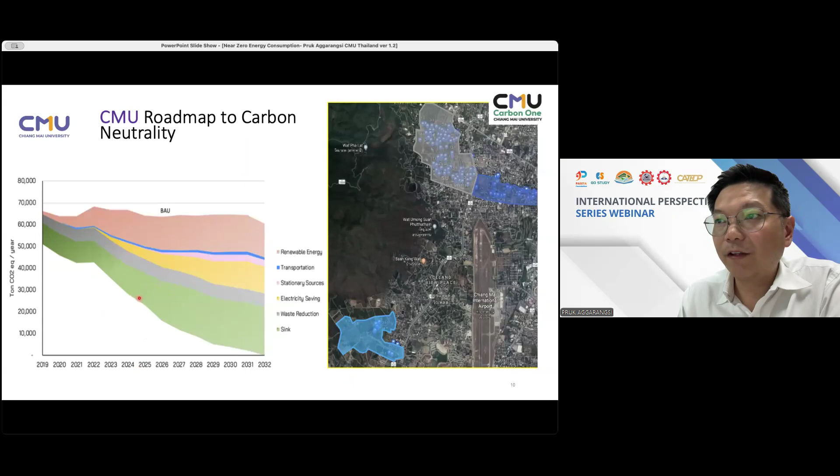So when you said you have a roadmap, it actually looks like this. Today is 2025, about halfway since the draft of this roadmap. CMU said 2050 is too far. CMU itself is not a big university - we have about 50,000 people, students, professors, including hospital staff, altogether 50,000 people. So it's a medium-sized university, but we are committed to 2032 footprint reduction to neutrality.

If you want to compare how big Chiang Mai University is, you can see this slim area here is Chiang Mai International Airport, like a 1.5 kilometer runway. And Chiang Mai University campus is here - campus number 1, campus number 2, and campus number 3. So we have altogether 3 campuses around the Chiang Mai International Airport area. So it's not small, but it's not that big in terms of a university.

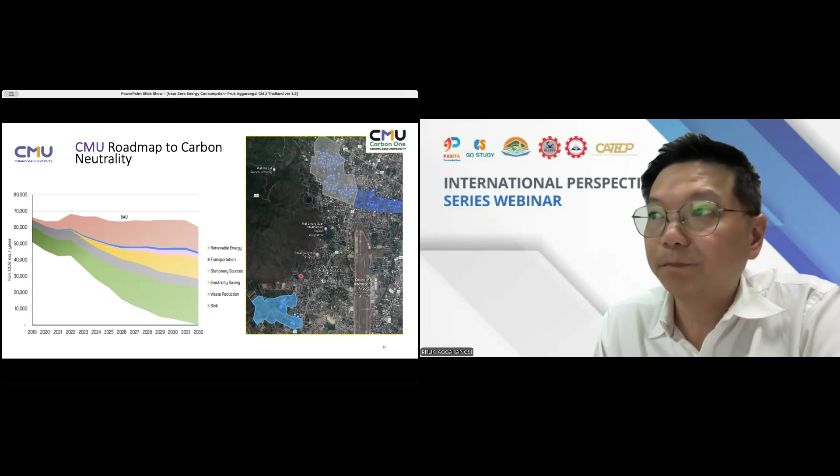Okay, so from those carbon reduction pathway or roadmap, you can generally dedicate topics into these pathways. Today we are going to talk about energy monitoring and demand control on the lower left side. But of course, we are doing something else like lighting, street furniture, infrastructure, carbon capture and storage, recycling and upcycling facility. So today we are only going to focus on energy monitoring, but in the near future, if we have another opportunity, I am more than happy to share other things with you too.

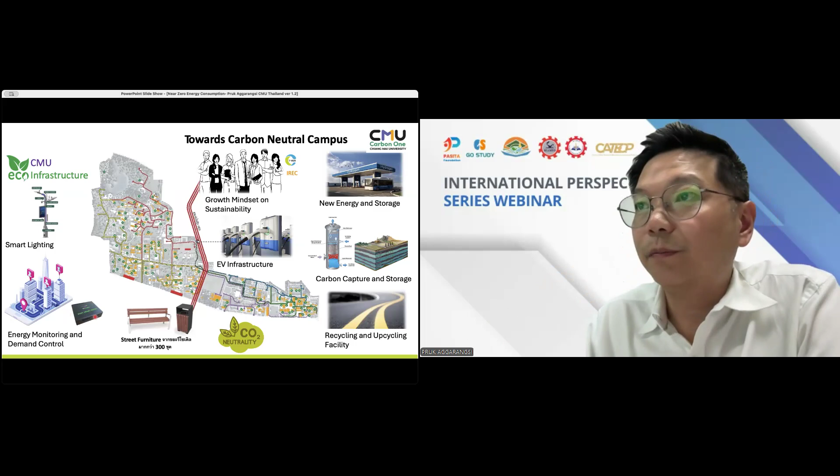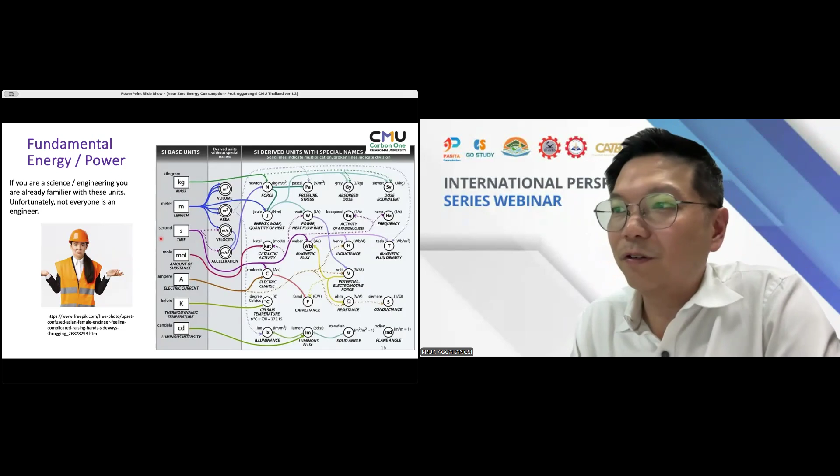Okay, so if you are not from engineering, nothing is wrong with you, because these number of units are the job of the engineers, it's not you. But if you want to learn, I would just give you a good hint: not everything you need to know. You only need to know a few things, such that you know how to measure energy, how to work with power rating and estimate energy. So that's the goal of today, right?

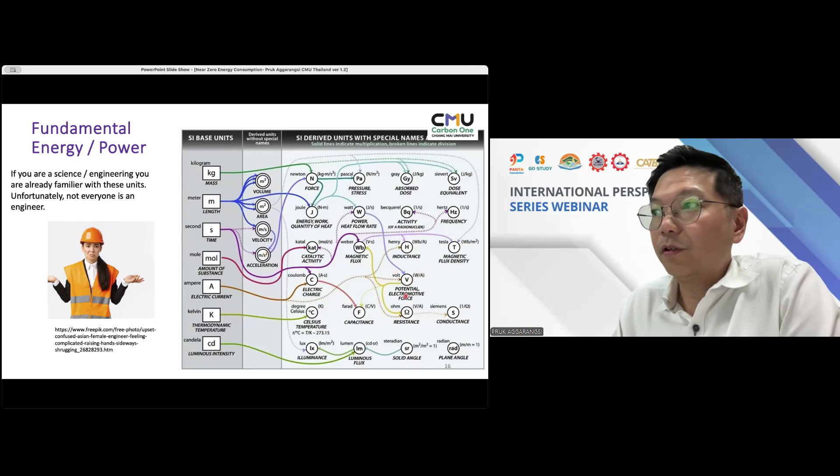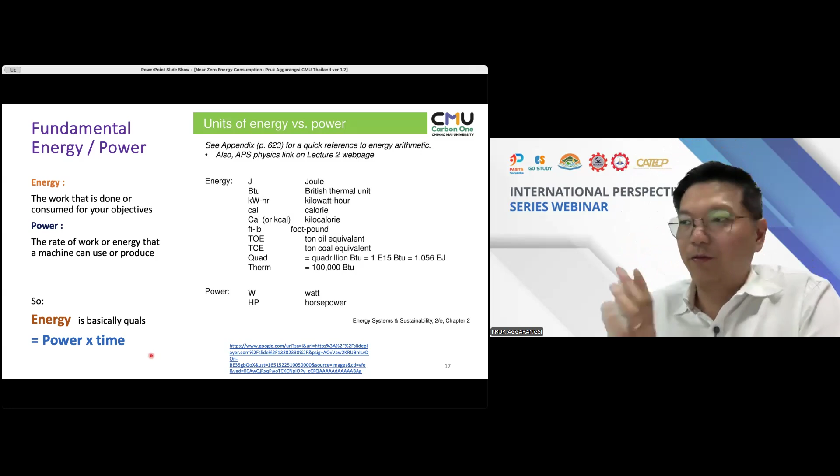So as we had done in the quiz, energy is the work that is done or consumed. Power is the rate of work or energy that can be used or can produce. So energy basically equals power times time, or power is energy divided by time, right? So it's straightforward as that. Because from this point, you're gonna hear words like kilowatt, kilowatt hour, watt, and so on and so forth. So let's make sure that when I say kilowatt hour, it's basically a chunk of energy, and when you say watt, it's the power of the machine or the power that is being consumed. So that is that.

So in real life, you have to come across a lot of energy. Most familiar is electrical, you use it all the time.

In fact, you are plugging in your computer right now. You are familiar with this, but there are other forms of energy. So that is why you have to convert.

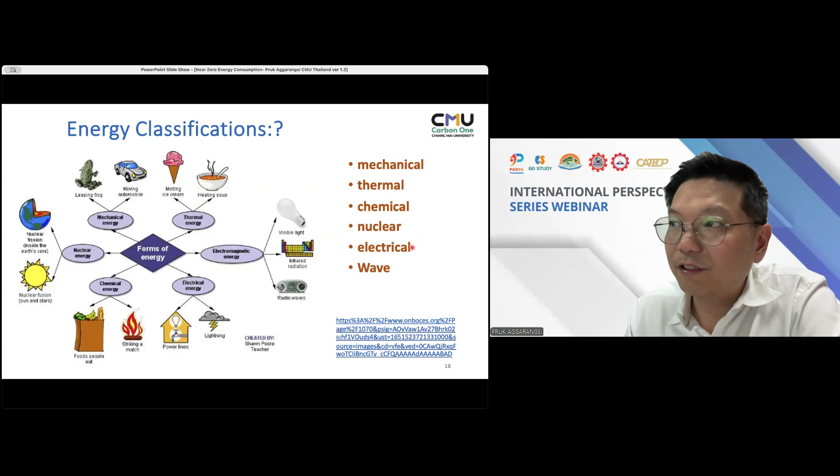For example, you have natural gas, you have to convert natural gas to electricity. Natural gas is chemical energy, because it is a chemical composition that contains energy between the molecules. You burn it up, you change it into thermal, and then probably into mechanical, and then you change it further into electrical. So in order to produce energy, you actually convert a lot, especially when you produce it from fossil fuel. You have to convert to many forms of energy until you get electricity.

Let alone you have to transport electricity by the transmission and distribution. So that's a huge infrastructure to support you having electricity. The convenience of electricity is just the accumulated action from the past, that you keep building infrastructure, you keep building the stable facility to support your convenience. So it's not easy to deliver electricity to your house or to your building or to your office.

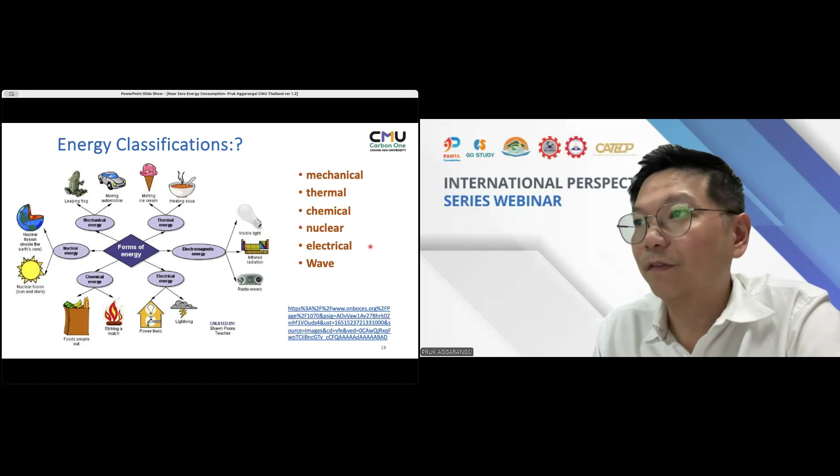Okay, energy comes in several forms. So right now, I think we all agree that, okay, number one, electricity is not easy to produce.

Number two, it uses up, especially if your country, including Thailand, uses the majority of input as fossil fuels. You keep burning fossil fuels, produce electricity, deliver to your house, and then you consume. Then as a consumer, you never have to think for a bit about where it's from. It's always delivered, always very convenient. So that's not very good. I would love everybody here to consider that electricity is not easy to deliver to your doorstep or to your electrical outlet.

In order to proceed, number two, you need to know the unit of electricity. Electricity measurement, right? So if you are a concerned citizen, I think we all agree that we are all concerned about the consumption of electricity. So electricity or energy is power times time, right?

As we agreed, for example, if you have a refrigerator that has a power rating of 800 watts - power rating means whatever is written on the label of that machine. If the power rating of the refrigerator is 800 watts, that's actually the maximum electricity the refrigerator can take. But in normal operation, it only takes 20%. So good for you, it only takes about 160 watts on average. But electricity supplied to this refrigerator is being plugged in 24 hours.

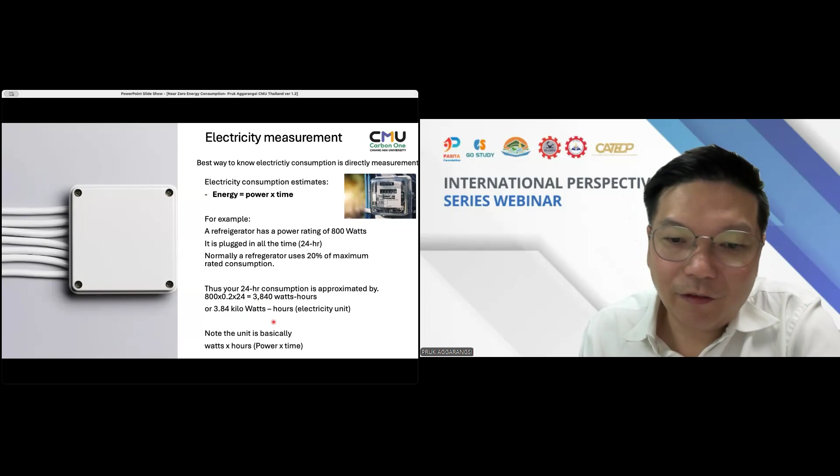You multiply with whatever rate your electric company is charging you. With that, you have to pay them at the end of the month. At the end of the month, you multiply this number by the price and by 30 days, and that's how much you have to pay for that refrigerator.

Of course, this number is an estimate. If you are not such a concerned citizen, you open that refrigerator almost all the time, that 20% might increase to 50%, who knows? But in general use, that number should be okay.

So the unit is basically power multiplied by time, and in this case, the time used to calculate the unit of electricity is hours. So one unit of electricity is a kilowatt hour. I think we all agree on that. Sorry if I repeat something so easy for you from engineering or science, but I believe there is an audience that's not familiar with these two.

Okay, let's talk about buildings. In a normal office building, especially in Thailand and tropical countries like ourselves - I think many of you are also from Indonesia - you can easily get about 50% of electrical consumption going into air conditioning. I think that's normal. In Thailand, in some seasons, like summer season, this number goes up to 65%.

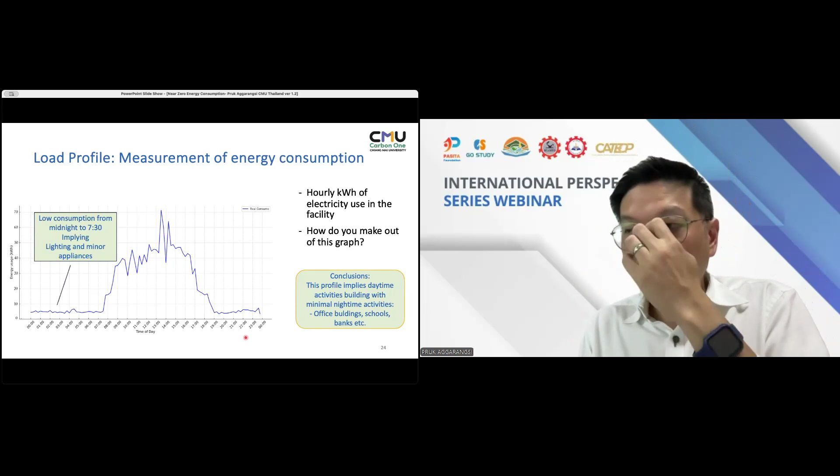So these are the observations: low consumption from midnight to 7:30 a.m., implying no one is here. Only the lighting in the corridors and some facilities with minor appliances are consuming power. But then abruptly at 7:30, people start to arrive. That means from this graph alone, I don't really have to see the building — from this graph alone, we can judge that this is an office building, because you can see people arrive at 7:30 altogether and start turning on air conditioning, lighting, computers, and everything. It ramps up to this point.

It is about almost 10 times higher than the night loadings, okay? And again, an abrupt decrease after 7:30 p.m., indicating end of activities. So the conclusion of this facility — I have seen a lot of these — in fact, all of the buildings, almost all of the buildings except the hospital in Chiang Mai University, act like this. So why is this important?

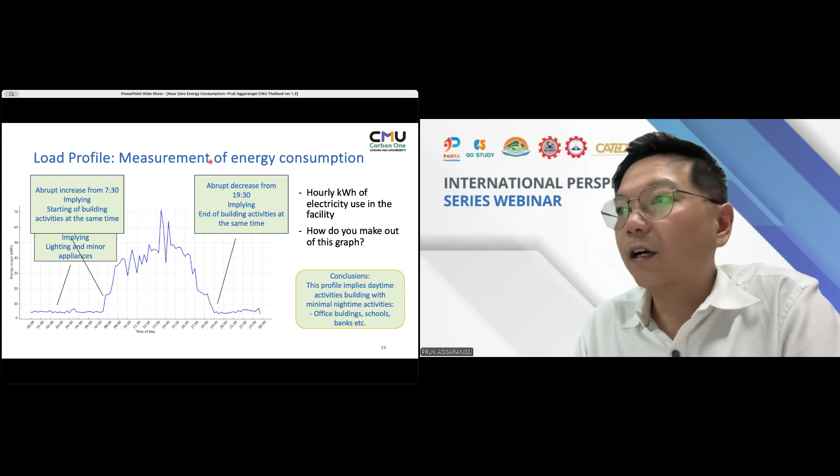If I have a graph like this from every building, I can plan further what to do with that building. So this building can be an office building, school, university like ourselves, banks probably, department stores maybe, and those kinds of daytime facility buildings. So this type of building has to be managed with one set of principles.

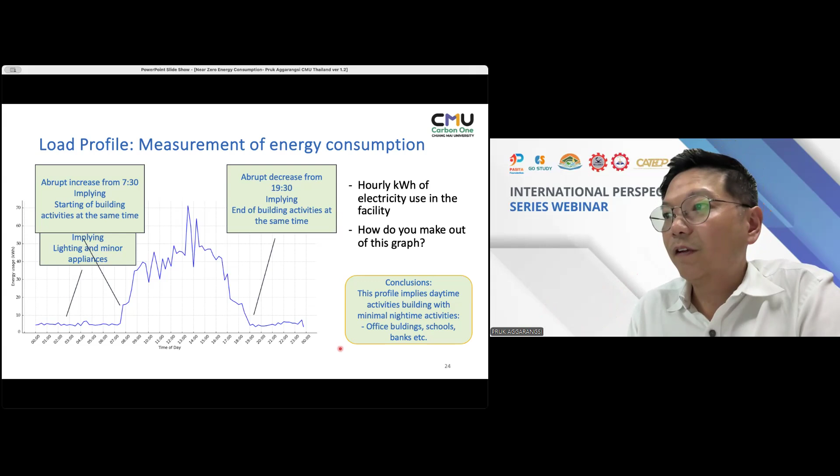And then what you see next is, you start to arrive home about 6 p.m., and then you start doing something — some cooking, maybe some activities, you turn on some appliances — and then at the end, you turn on your air conditioner and go to sleep. So if you see this kind of curve, I would say it's a typical nighttime household profile.

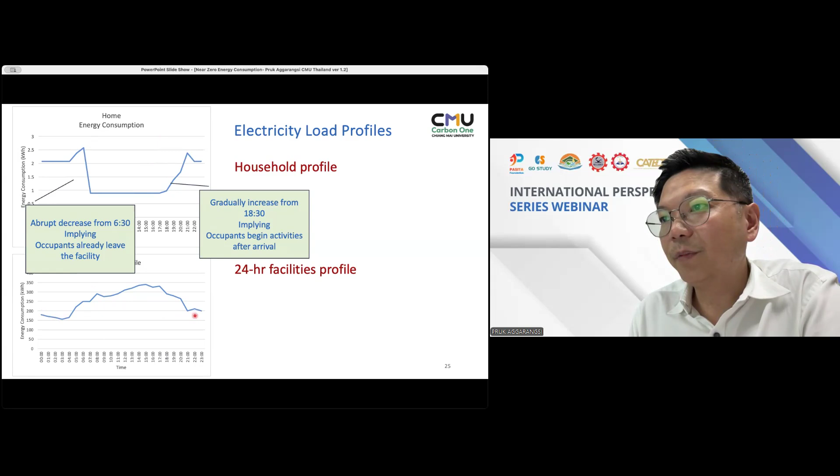Okay, so that's another type of electrical profile. But then let's look at this hospital profile. You can see there's not much change between 24 hours. It doesn't go to zero in the nighttime.

It's still about half or more than half of whatever happens in the daytime. So something suggests that this building has activity for 24 hours. For example, in a hospital, the air conditioning system never stops, right? But then during the daytime, there could be more activity than the nighttime, but the majority of the consumption never stops. It's 24 hours, so it's implied that this facility has 24 hours service, okay.

So daytime load likely curves towards the temperature of the day. That's another observation, right? Basically, people come in, have more activities. When more people come in to use more activities, and also the daytime temperature increases, the load increases according to the temperature and the activities. So you can justify or make an educated guess that the main consumption should be air conditioning.

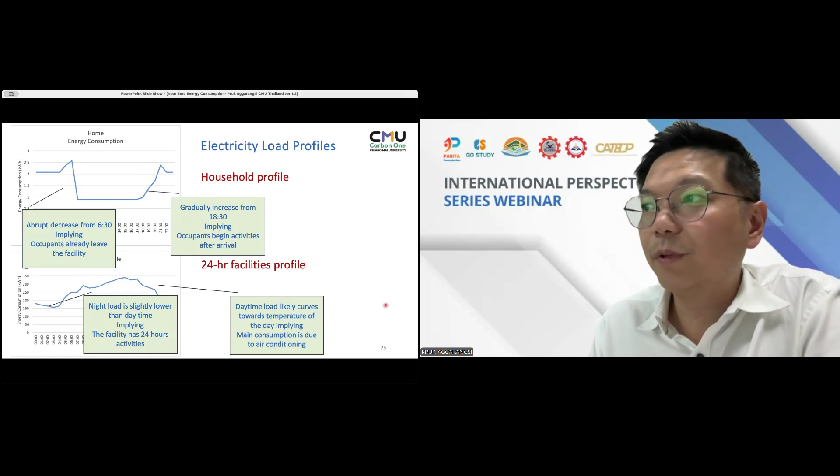So being in the field of energy management is more or less like a fortune teller - instead of reading the lines on your palms, you just read the lines from the graph and make a good guess about the facility. But it doesn't end there. You have to suggest, when you know this, what can be done more, what you can do better to optimize this facility.

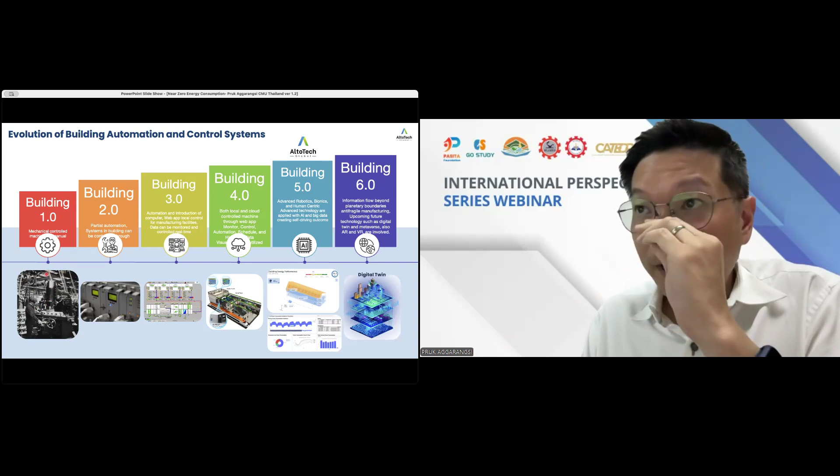You never know - you're going to have to do almost manual measurement, right? And we try to upgrade those buildings into 2.0 or 3.0 where you can monitor and have some control of the facility. So in the near future, you will see more and more new buildings being built with more and more control. Building 4.0, you have absolute control, but it's still human control.

You have a control room, seeing everything - which light switch is on, which aircon is on, what is the temperature outside, how many people are in the room - and you can manually switch on and off or adjust temperature or adjust whatever power consumption in any room. You can see a lot of these 4.0 already in many new buildings, in hotels, in convention rooms, in department stores, because it's so convenient for them not to walk a long way to turn anything on and off.

So when you have 4.0, the next leap is the so-called AI integrated system. You can have someone else working the job for you, making the decision for you within the rules that you set. For example, if the building sees no people in some room, it can automatically turn off the aircon or turn off the lighting by itself. You don't really have to do anything.

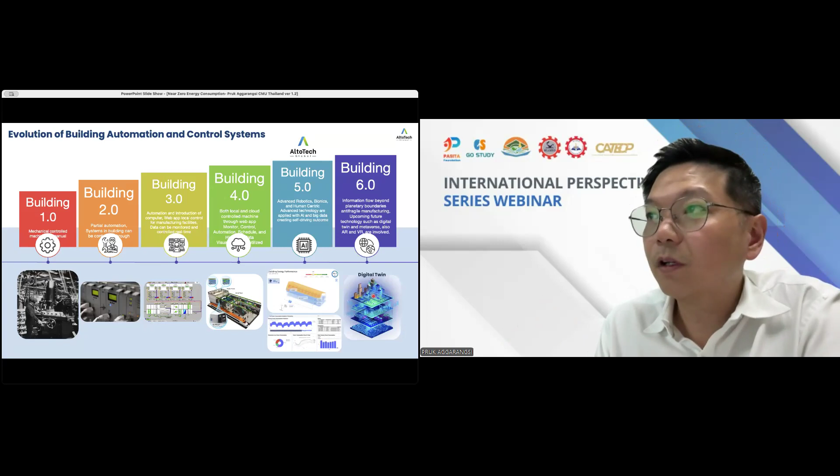Okay, so the problem arises - if we have a 1.0 or 2.0 building, how can we become near zero? The mission of this building is we have to turn this old building into a near zero consumption building. So the definition of near zero means it has very high energy efficiency, right? So you have to, of course, work on the hardware like insulation, air leakage, lighting and appliances, making sure that they are highly efficient, low energy consumption, with an efficient aircon system.

And then another important approach is you have to integrate renewable energy into such a building, and you have to integrate energy management into that building. Okay, so I can show you a little bit more about that. If you want to put that in numbers, usually building 1.0, or the building as we're familiar with, is way out here - the building that we use as is, we don't have to care about anything.

We haven't been looking at the consumption. If you start to manage and optimize the efficiency of the building, you can decrease the consumption, let's say from 1.0 to about 0.65, or even sometimes by half of the general consumption. This can be done especially in an old building. Sometimes you just replace an old air conditioner with a newer, much more efficient version, and you decrease the energy consumption by almost half of what you've been paying. Sometimes investment into new air conditioning pays back in 4 years just from efficiency improvement alone.

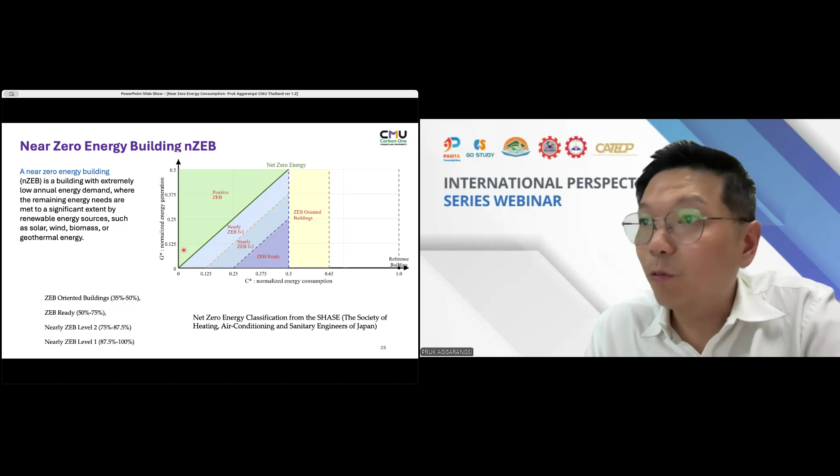First goal: reduce your consumption. Second goal: try to produce more renewable energy. The easiest renewable energy to produce is obviously solar energy. You can install solar, wind, biomass, or whatever, but solar is the easiest way.

Before we talked about conventional buildings with transmission and transformer buildings. You can also have an electric vehicle charger. But if you want to integrate solar panels into the system, you can just install it, or you have a choice of installing solar panels together with energy storage.

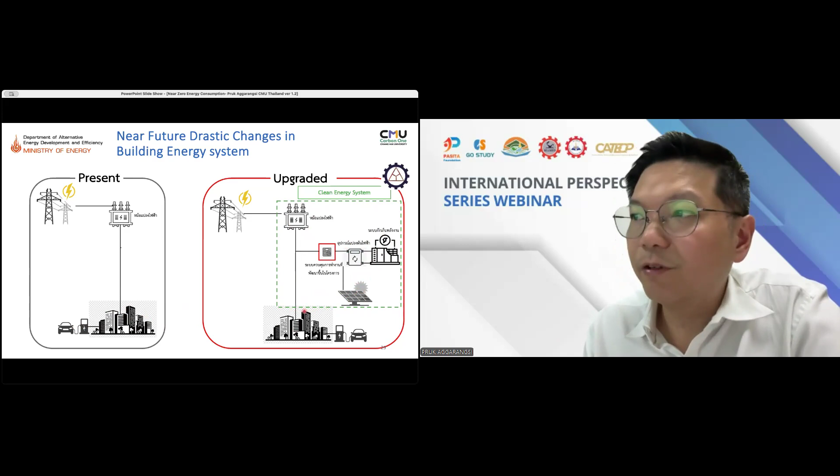Sorry, I haven't changed some Thai words, but it's solar and energy storage. And then in the green box here, you have an energy monitoring and control system. That is the approach we took with our buildings.

So what we did was with the Energy Research Institute building in Chiang Mai: you have energy consumption of about 100 kilowatts, and you have three solar systems of 100 kilowatts and 30 kilowatts. The number already looks good, right? You only consume 100 kilowatts on average, but you already have 100 kilowatt plus 30 kilowatt plus 30 kilowatt of solar panels. That 160 kilowatt looks like you're in good shape.

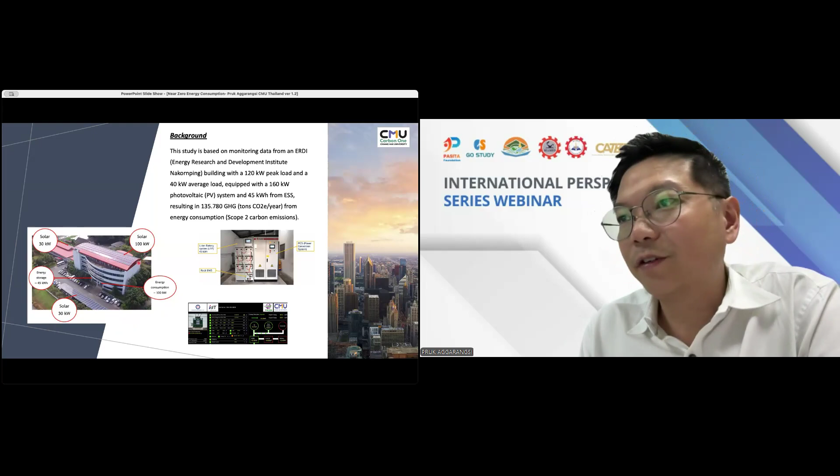On top of that, you still have nighttime consumption where you don't have solar at all. So it's very difficult to match this 100 kilowatt average with the 160 kilowatt solar and achieve zero energy consumption. So the help we have is this: we installed a battery system such that you can try to match the solar panel output with the energy demand.

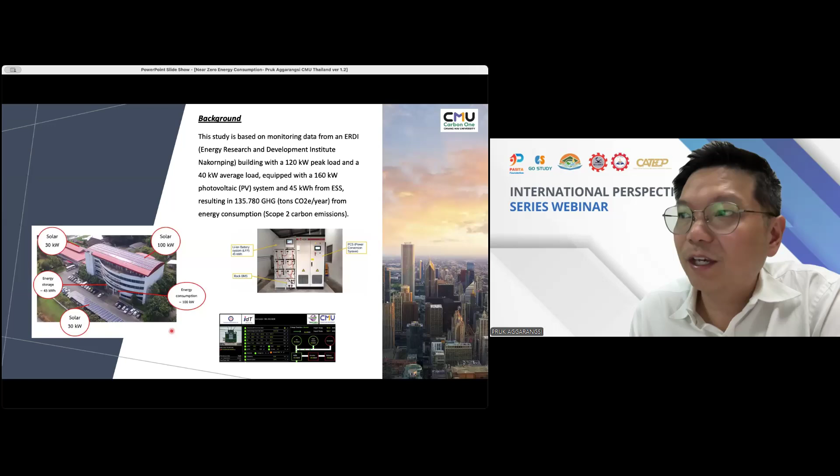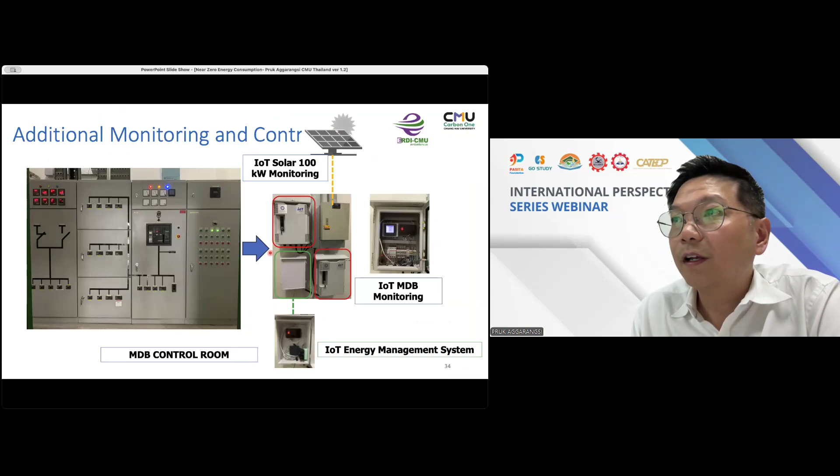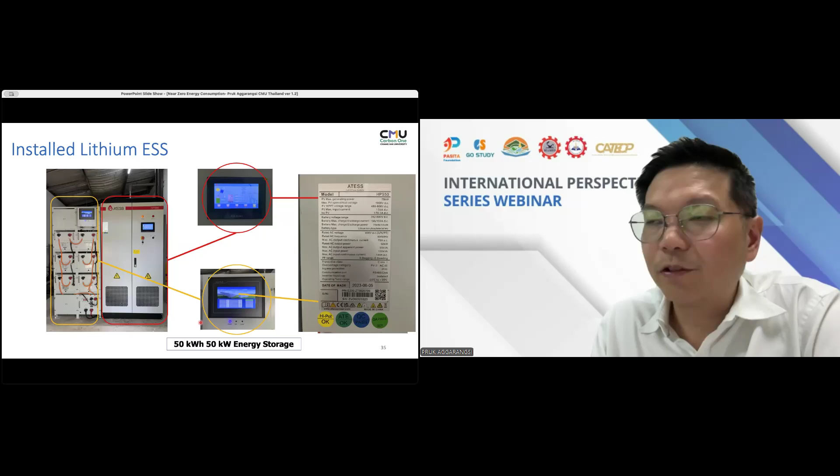So after you install this battery—about 50 kilowatts of battery installed in the building—then in the building you also have an electric vehicle charger that you have to monitor, and you also monitor this. This is an interesting part.

You actually install a sky monitoring system. All in all, you try to predict the amount of solar energy that is going to be produced. If you have this information, you use it to manage the battery. For example, if your camera can see a big cloud coming toward the building, you can send a command to prepare or get ready to the battery, meaning the battery has to charge and then get ready.

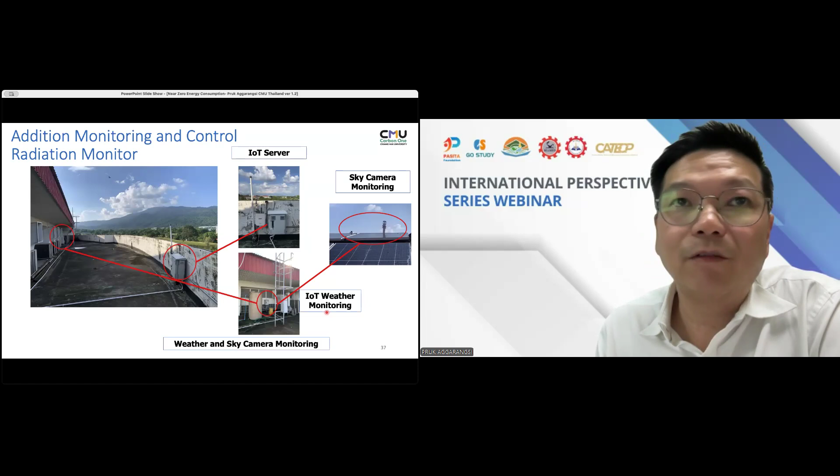Once the cloud comes through and you cannot get sunlight onto the solar panels, the battery has to discharge, or has to supply the electricity instead of the solar panels, because at those moments, maybe 10 minutes, 30 minutes that the cloud is shadowing the panels, we have almost zero power from the solar panel. You need power from another source, so in that case, it's the battery.

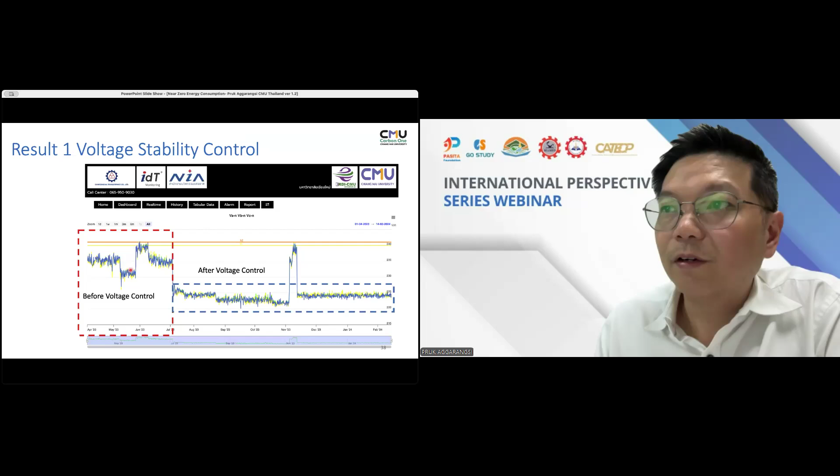So you have this kind of building, as well as you have the stability control. Okay, maybe we can skip that, it's not relevant. But what you can do is this. Okay, we have tried that.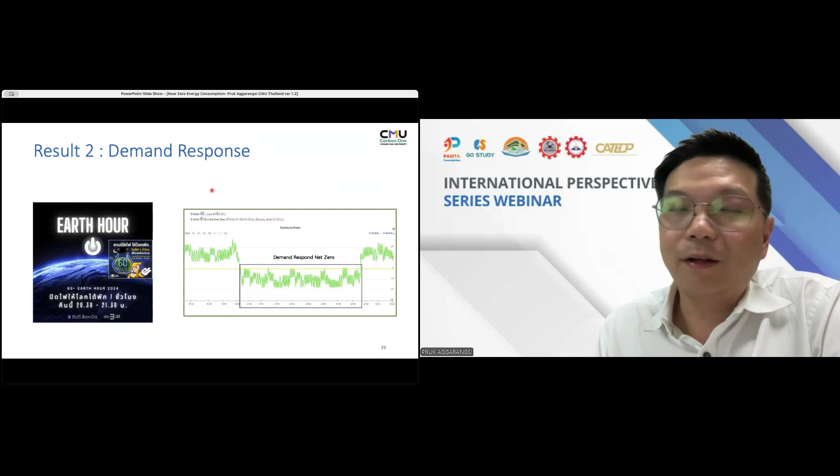During so-called Earth Hour, when people promote turning off everything, our building doesn't have to turn off. We can still work during those hours, but you supply from the battery, and from the outside it looks like zero consumption because the battery is actually supplying. You do not get electricity from outside for these hours. So basically, if you need to respond to any demand from the outside, your battery can assist you with that.

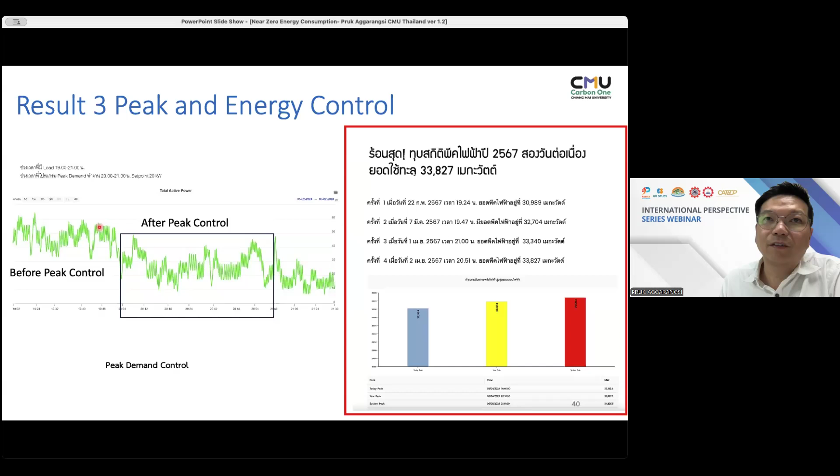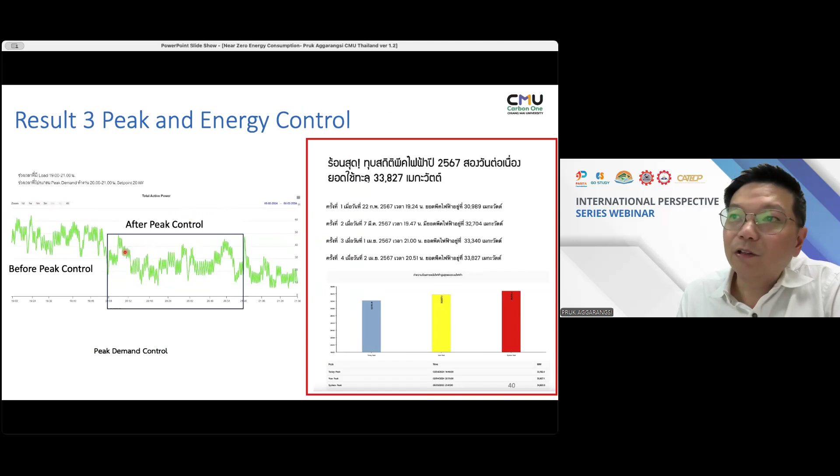Number two, in some buildings, and this might be familiar to those who already manage energy, you are also being charged for a so-called peak period or demand charge. If your electricity demand is too high, your electricity bill is automatically bigger because you need more power. So our battery can also be programmed such that whenever you have high power consumption, the battery helps reduce that power demand so you don't get charged the demand charge or power charge. So that also works in this case.

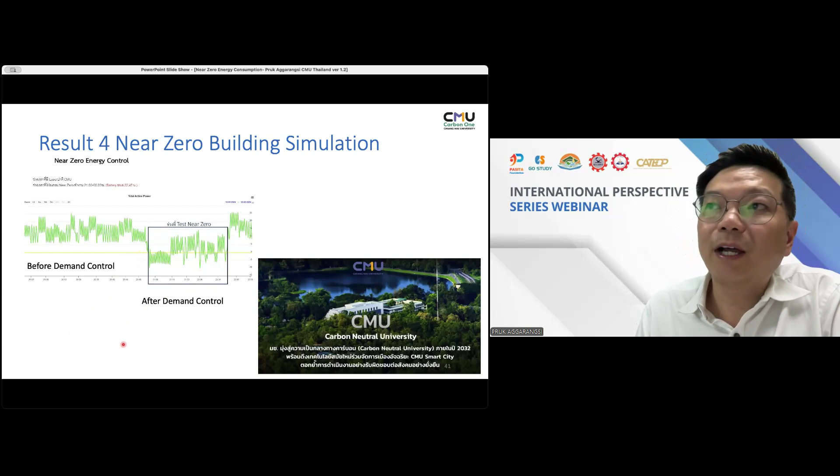And this is basically the normal operation of this battery right now. Of course, our target is to be a near zero building. So if we want to be near zero, the battery has to supply most of the time that the solar panel cannot supply. Obviously our battery is not big enough, but up to a certain time, for example 1, 2, 3, or 4 hours, you can demand the building to be very near zero consumption.

All in all, I don't want to go into much detail, but I have this paper published, I think at the beginning of this year, that says: for this setup, if you want to be level 1, very close to zero, you're going to need to install 200 kilowatts with about 275 kilowatt hours of battery system, or 250 kilowatts of solar power and 175 kilowatt hours. Basically these two points will get you to level 1, or very close to zero.

So this work is important as a good suggestion for budgeting. If the goal is to be very close to zero, this optimization, whatever I have published in that paper, will make good suggestions for an estimation.

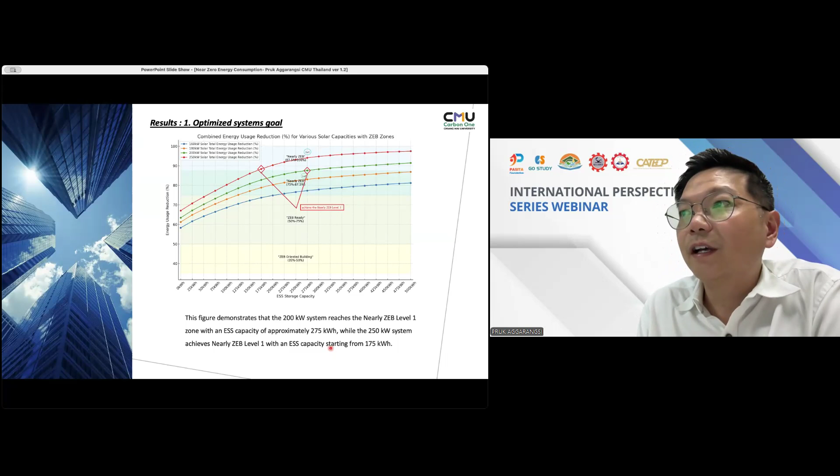And of course, you can have other things in the future. This is our future research. You probably want to have a chilled water storage system. For example, if you have too much solar during the daytime, you might not have to have a big battery, but instead produce cold water just to supply to your aircon system. Or you can store your energy as hydrogen, which is the future of many countries' policies.

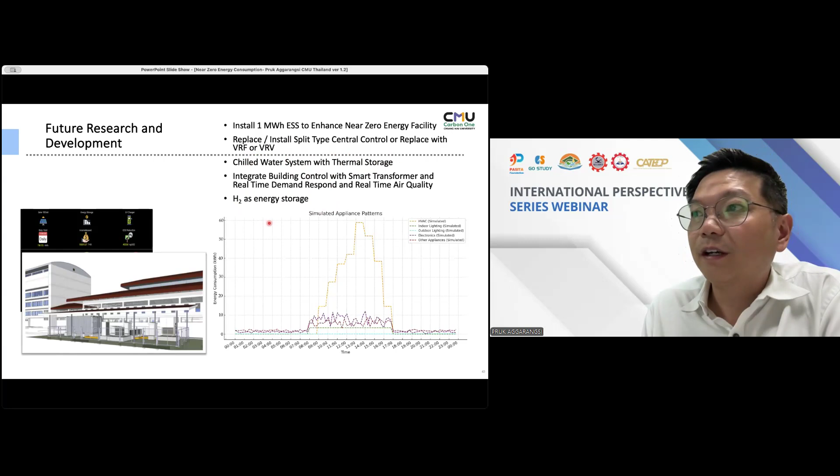You can still grow some vegetation or herbs or plantation that doesn't need strong sunlight. We have practiced quite a few of these plantations inside CMU campuses, and it works very well. Of course, it depends on the plants and the season, but in general, you do not lose land utilization. You can still use this land to produce food as well as to produce electricity, because obviously you need more electricity for your building to be near zero.

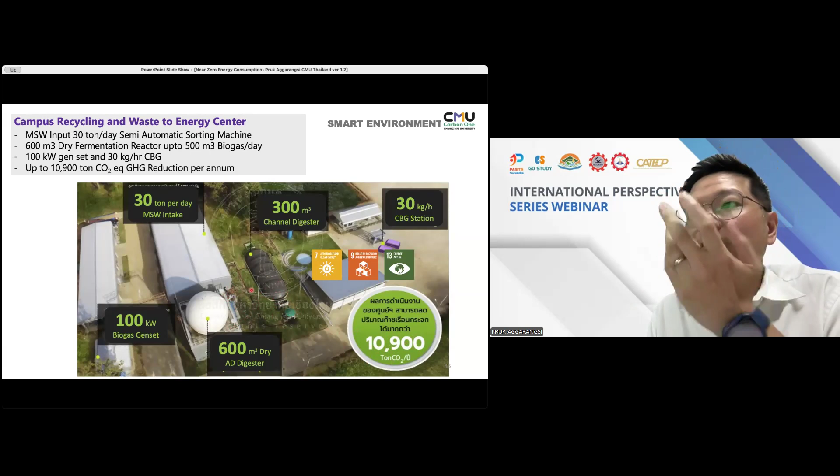But nonetheless, this plant is very important in terms of avoiding methane emission. Compared to sending out the food waste to be digested outside campus, we digest it on campus, capture the methane, and reduce or mitigate methane emissions. So in this case, it's a win-win situation. Of course, you have to invest into this facility, but you can reduce your methane emission—this is how much we had reduced—and you can produce some electricity out of this.

And of course you can do many other things: solar farm, solar hot water collector, the buses, the waste to energy, and then energy efficiency. So in order to have the result, you cannot just look at one building—you have to look at the system as a whole, and you have to work together.

I think that's the end of my presentation. Maybe I went too quick, but I hope you enjoyed it. I'm very happy to discuss further with you, or if you have questions from the chat box, I am very happy to answer that.